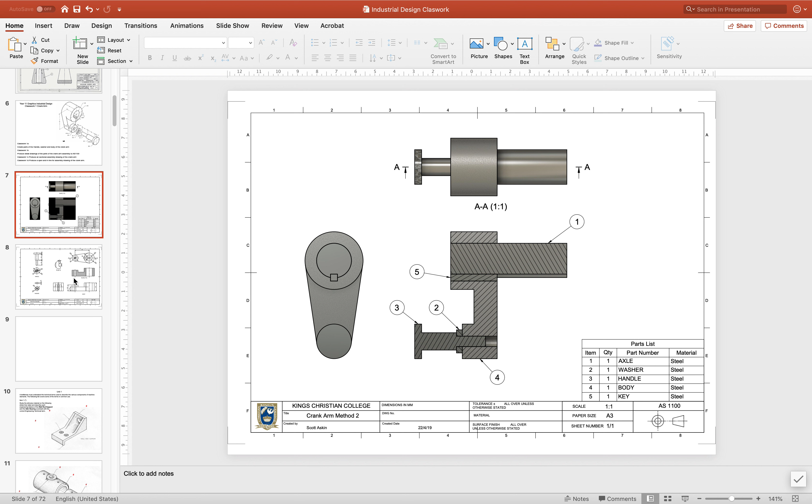Basically what you're going to end up with is something looking a little bit like this. There's your 5 parts. You can see our sectional front view here. We've got our handle, the washer, there's the body, there's the axle and a keyway going through, and there's all the parts there as well.

Okay, so to start things off, let's familiarise ourselves with these dimensions. It might be a good idea to have this on a printed handout beside you so you can quickly make reference to it rather than having to flick back in between screens.

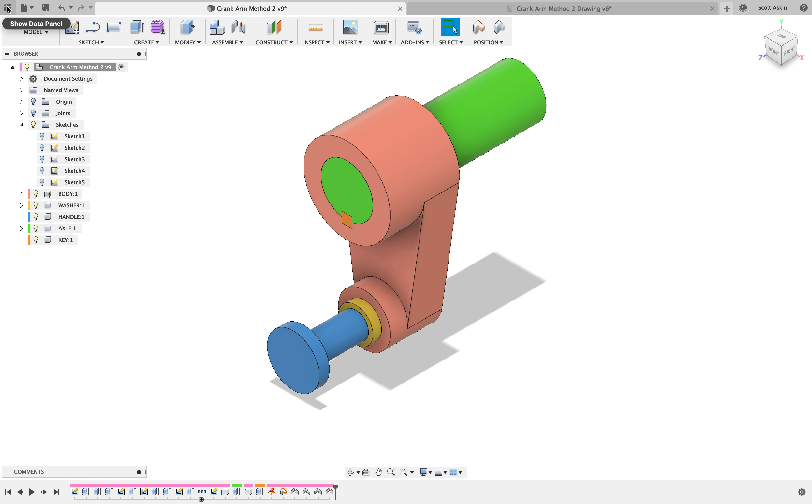Okay, so let's go to Fusion, and you can see here, here's my one that I've finished before. So I'm going to go back to my data panel, and I'm going to make sure that I'm in the correct project, which I am. There's my classwork 1 crank arm. If you haven't yet done this, you'll need to go back to your main menu if you like, and under the projects tab, click on new projects, create a new project called classwork 1 crank arm, and all of the files, drawings and models and parts are all going to sit inside this folder if you like.

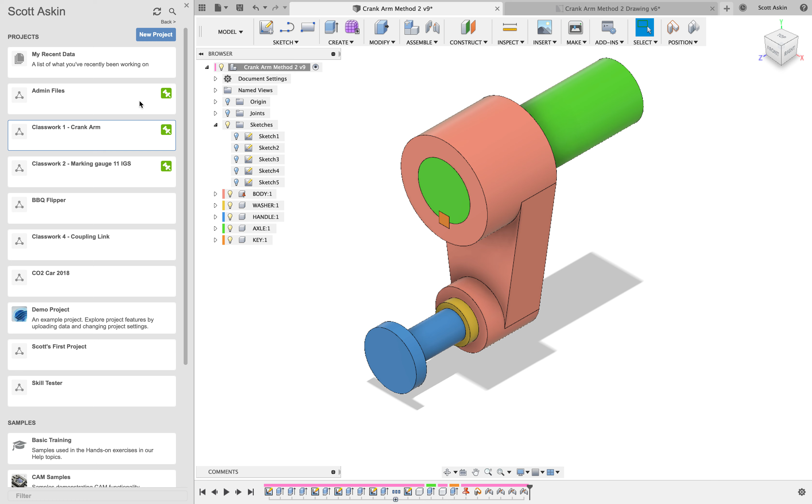You can pin things to make them appear at the top of this list as well, rather than being down here. You can pin it up like so by clicking on this little symbol here. It says pin, and it'll move it up into this important area. Okay, so I'm going to drill into there, and you can see I've already got some existing ones, so I'm going to start a new design, and I'm not going to name it just yet. Actually, no, I'll show what I'll do.

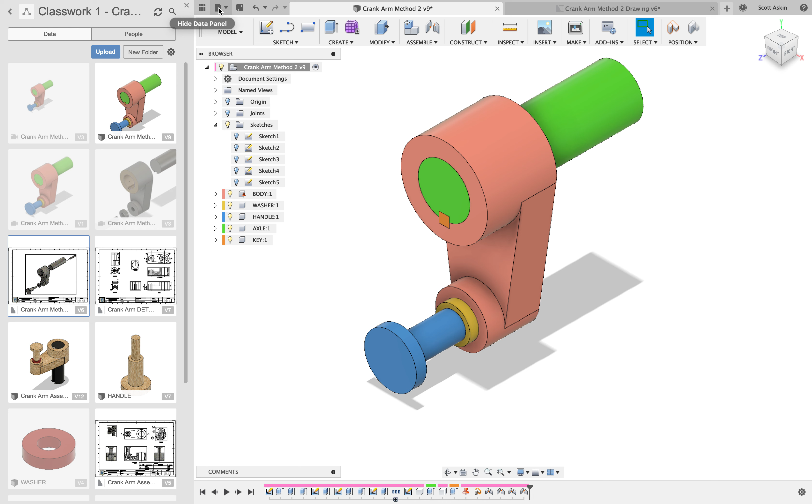So I'm going to come up to model. I'll make sure that I'm in the modeling environment, I should say, to start off with. You notice that there are all these other environments. Make sure we're in the modeling environment. And where are we? Here we go, here, file and a new design. And I might close the data panel so I've got some more real estate.

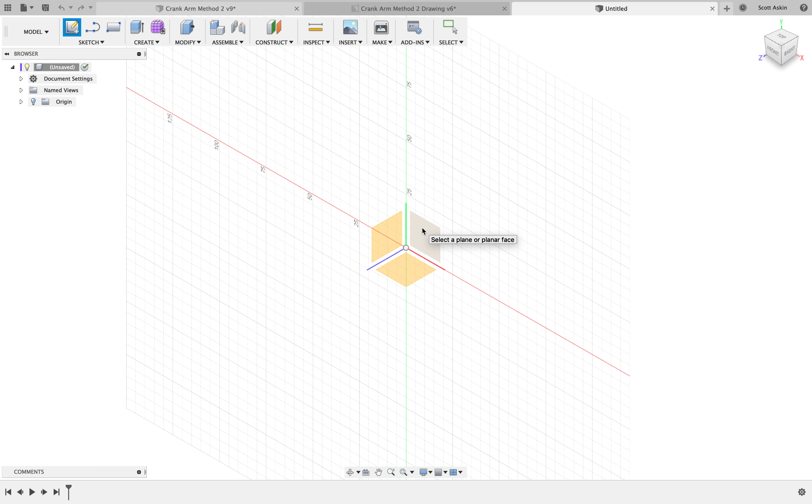And at this point, I'm going to draw the shape of the body for the crank arm. So I'm going to click on this create sketch, and I'm going to choose one of these work planes. It really doesn't matter which one you choose. I might just choose that one for argument's sake. And then I'm going to start to draw the shape of the top of the body here and the bottom of the body there. Now it's mostly made up of a lot of circles.

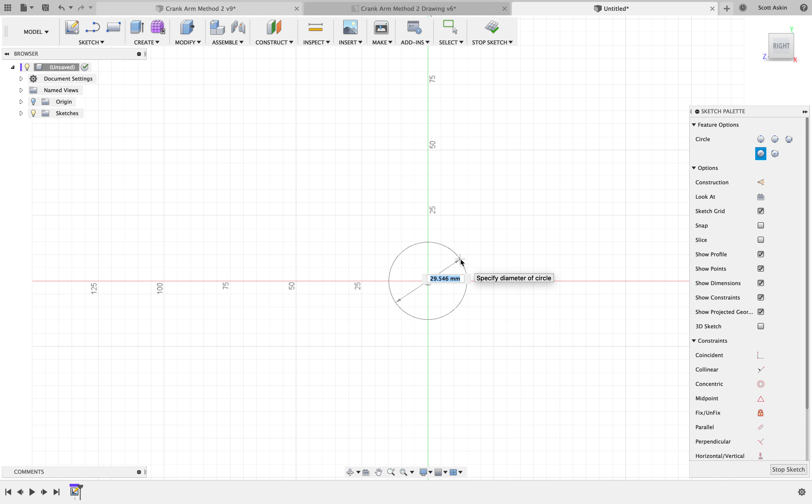So C on my keyboard gives me a shortcut for circles. Click once, drag away. I'm going to go to the largest circle first, which is 50. Hit the enter key. Another circle for the hole for the axle. C again. Click once. Click, type in the distance. This time it's 30.

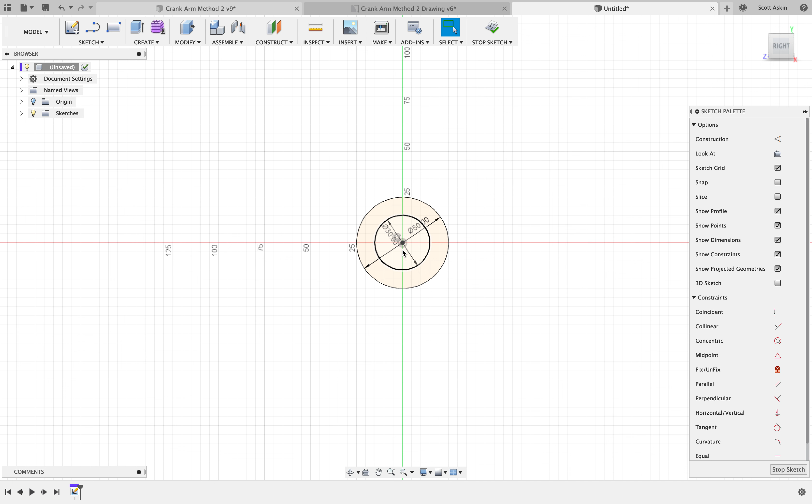And then I'm going to position the other circles down here for the bottom of the body. What I'm going to do to give myself a sort of point of reference is I'm going to click on C again, hold my cursor on this center here for a second, move it down, and as you see, move it down there, it actually gives you a little blue dashed line, which basically means it's locked onto a point directly below that. If you don't do that, you may think you've got the circle in the right spot, but it won't be directly below it.

So click once for the center, move your cursor away, and the largest diameter at the bottom there, I'm looking at 30, and it's got a hole going through it, so C again, snap to that point, move away, and the hole in the middle is 9.

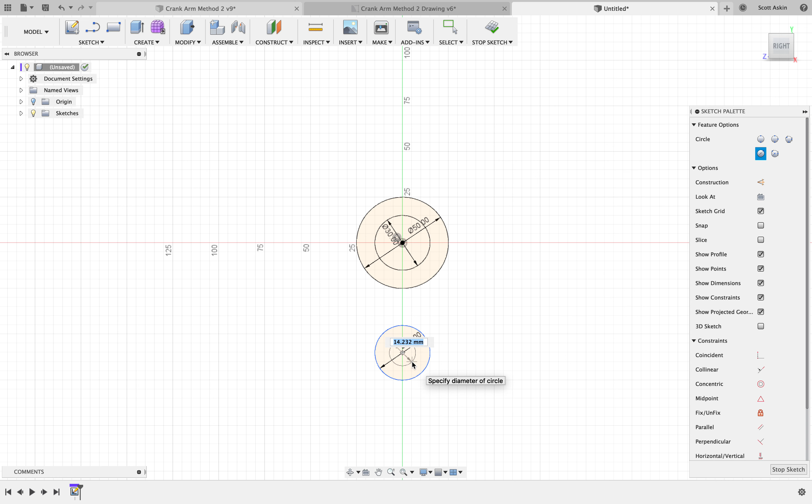And now I've got to draw 2 lines of tangency between these edges here. But before I do that, I need to make sure the distance between the centers of the circle is correct. So D on my keyboard for dimension. Snap to the center of this circle, 1. Snap to the center of that circle, 2. And drag your cursor away. Click again, and then type in the distance, which is 70 millimeters between centers. Now I've got those the correct distance away.

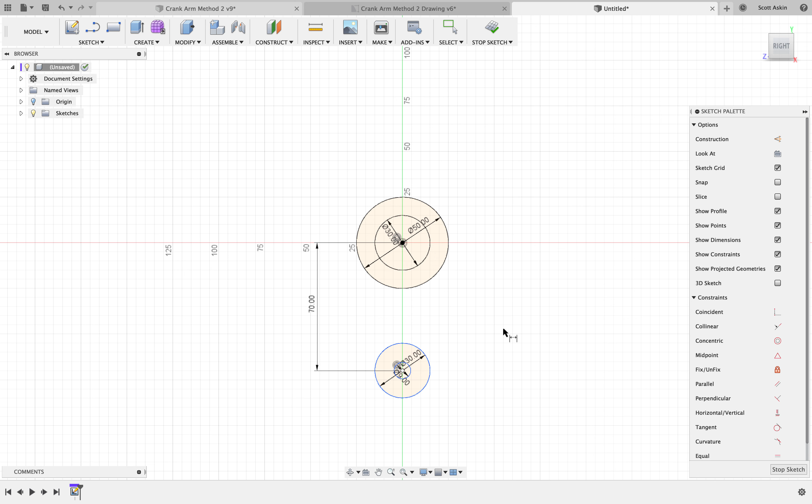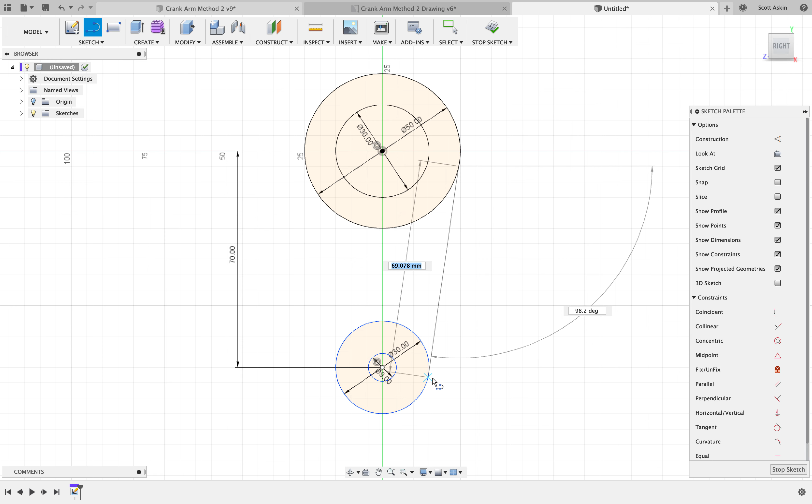Last thing to do then is to create 2 lines of tangency, so L for line. Hover my cursor somewhere on this edge here, so it's intersecting it. Click once. Bring the line down until you see the tangency symbol appear. It's like a circle with a line parallel touching its edge. You can see it changes. I'll zoom in a bit. Hopefully you can see it if I do it. No tangency until I get to that point there. And then I'll do the same on the other side. And there's the tangency point.

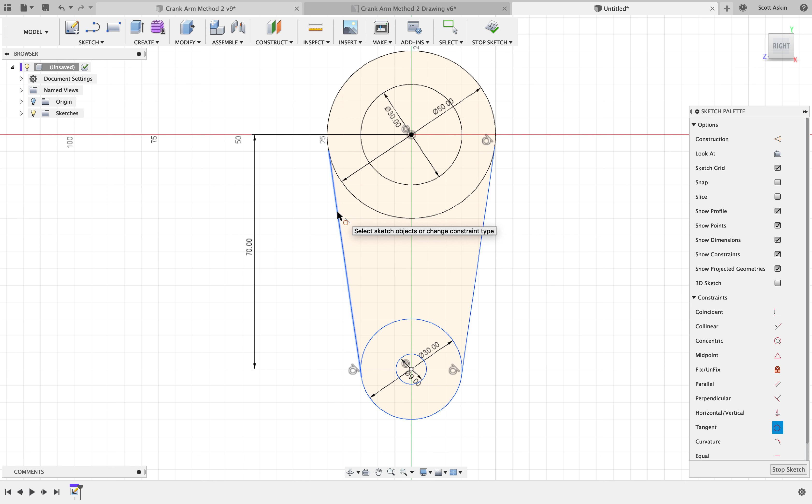Now you notice here we've got 2 tangency constraints for the line to the edge of the circle in here, but there's no tangency constraint up there, so we need to insert a tangency constraint. At the moment this looks like it's tangent, but it's probably not. So come across to your sketch palette, come down to find the tangency option, there it is there. Click once on the line that you want to be tangent, and once on the line that you want it to be tangent to. You see it's moved the line slightly, and now the constraint appears. I'm still in the mode of tangency, so I click on one line, click on the other line, and you can see it's gone tangent to it.

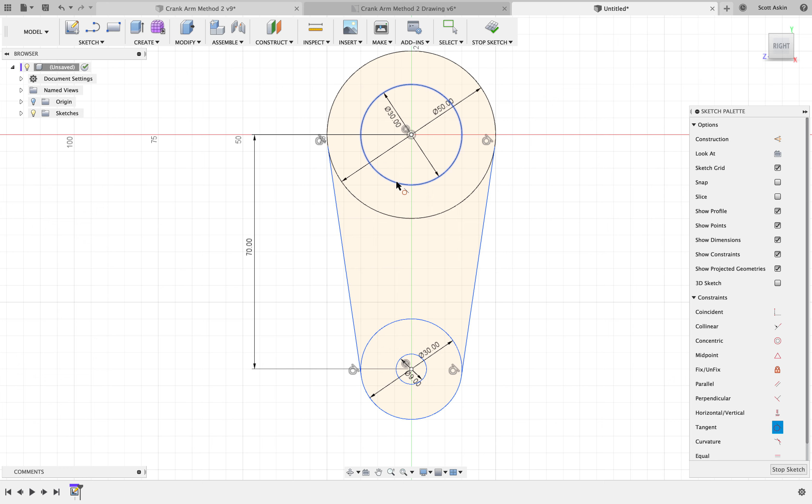Okay, I think I've got enough geometry. Oh no, we need to put the keyway in here. Okay, so if you have a look on your drawing, you'll notice the information given to you is that the keyway is 6 millimeters wide by 3 millimeters deep, and it is also on a point somewhere around the circle here. So what I'm going to do is zoom in a bit, and I'm going to use the rectangle tool, so R for rectangle, or you can use it up here in the sketch menu as well, there it is there. And what I'm going to do is hold my cursor over this edge so it snaps to it. See, it turns into that blue cross. If I click here, it doesn't really have any reference.

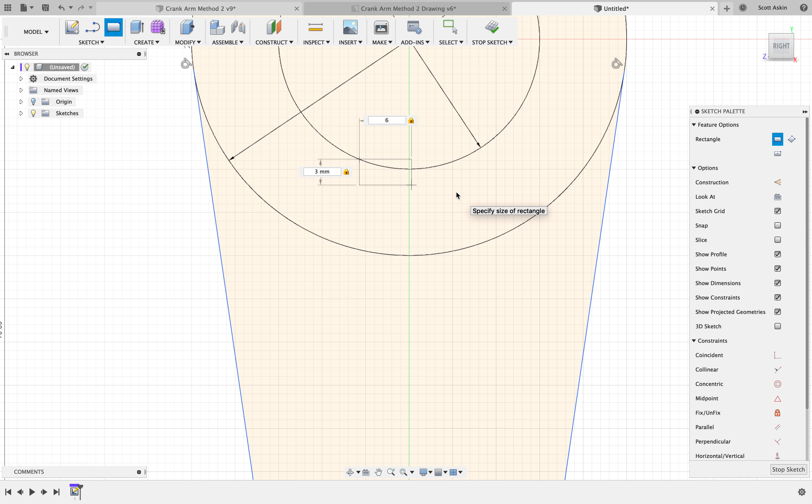So I'm going to snap to there, click once, drag away, and then I'm going to type in the distance of 3 for its depth, then hit the tab key, and then it's asking me for its width, which happens to be 6, and then hit the enter key. Now you can see there that it's not in the correct position. So what we need to do now is to be able to constrain one edge to, say, a center point or something like that. So D for dimension,

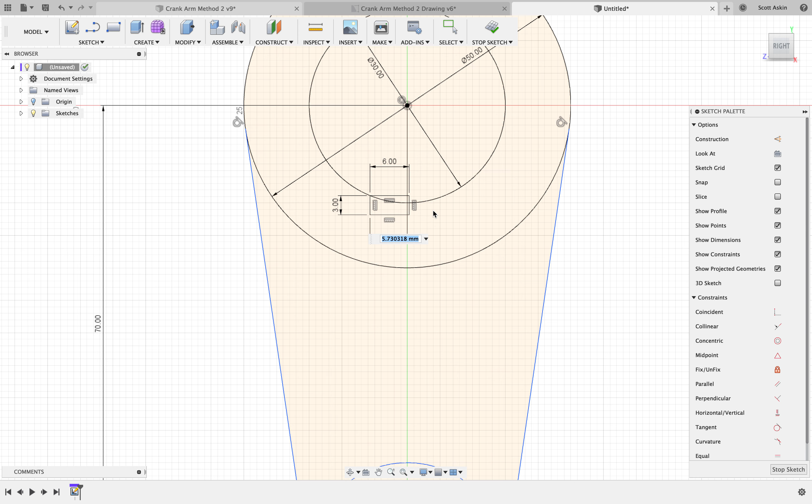click one edge, find the center of the circle perhaps, and you can see here that gives me the distance from that edge to the center. At the moment that's 5.73. Well, I'll click there and I want to make that half of 6, so it's equidistant either side of the center. Make that 3, hit enter. We'll zoom in on that, and we can see that that is still on that edge. Come over here, it's also on the edge as well.

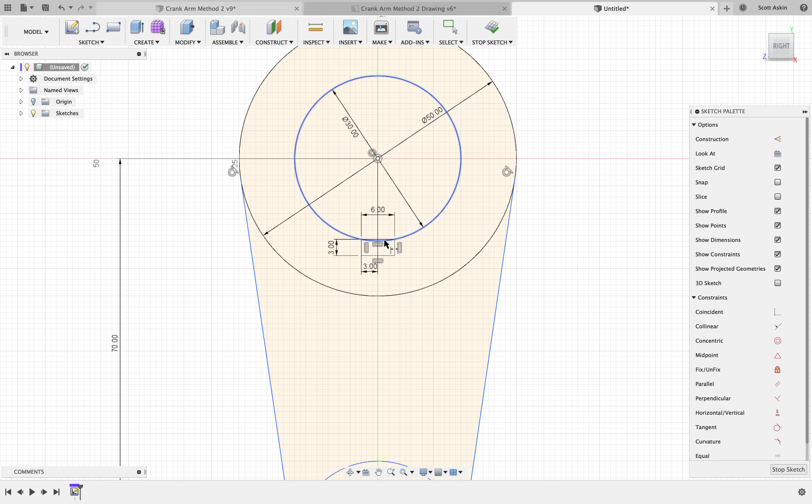Now traditionally, if you were in Creo or something like that, you'd trim all these excess lines away and so on, but one of the great things about Fusion is you don't have to have a closed loop of lines. You can actually pick and choose what you want. Okay, so that's the first part to actually create the geometry for the body and actually most of the rest of the parts as well. See if you can get that far, and then we'll continue with lesson 2.